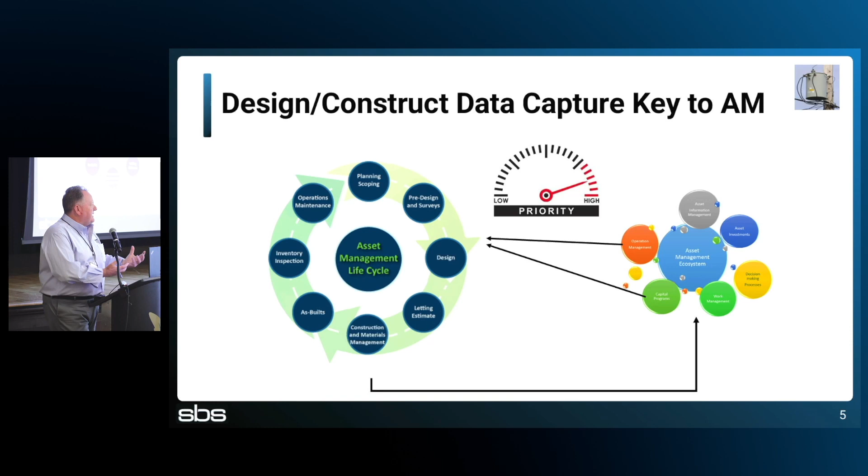I'm sending this data to the field. You put it in the ground. You're getting ready to energize it. I need to know my AMS system. I need to have the finance costing. I need to have all this data to get these safety things done going forward.

So really, the design construction part of asset management was really kind of a low priority. Go put it in the ground, we'll get it in the GIS, we'll get it into SAP and Maximo. It wasn't timely because we'd just make sure at the end of the year, come October, we'll pay our taxes on it.

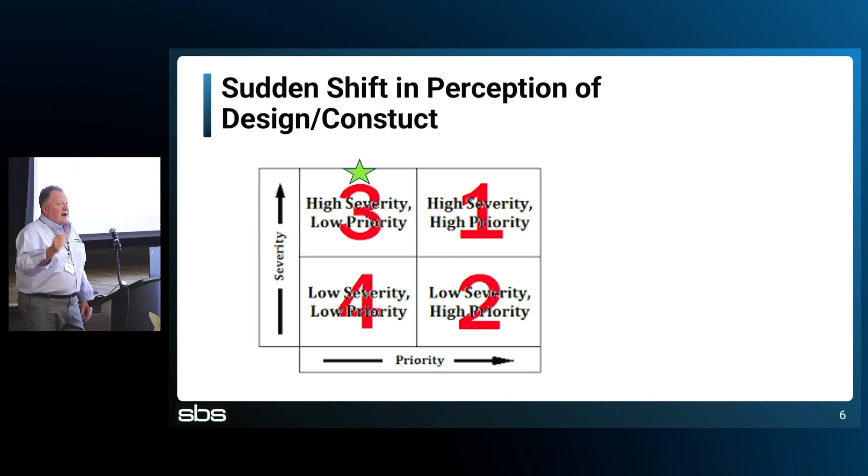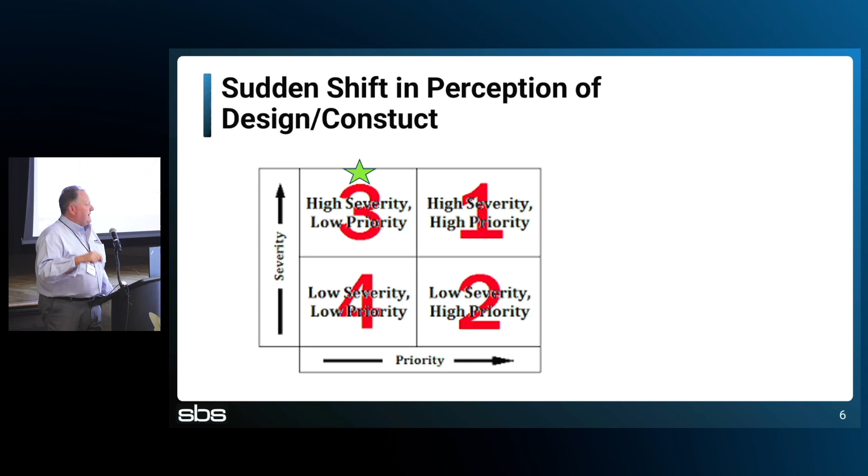But it's now becoming, I need to know what is in that ground and what is energized the moment you declare it's going to be an asset till the moment it is an asset. We now have utilities where it's an asset the moment it falls into your design. It gets an asset ID immediately, before it's even gone through the process.

So at this point, we're going to turn it over to the truly technical person, Sergey.

All right, so we tried this time not to bother you with just a standard demo, but really focus on one specific topic: how you, as a designer, can collaborate with the field, and what kind of tool technologies are available out there so you can really take the benefits and advantages of that close collaboration.

And we have quite a few examples to share, so I'll be switching back and forth between being a designer, and then I'll play a few roles in the field. I'll play the role of a crew member, a foreman, accepting the job, and that's the setup. So we have AUD running

in the office, and it collaborates with the field maps through, in this case, Esri ArcGIS Enterprise. I just want to set the stage. So everything we show as a workflow and steps is actually enabled with the UDH integration with other mobile frameworks. We use Esri Field Maps as an example, but capabilities are very similar if you use Lacana or other technologies. So we have integration built in. Field Maps is just an example here.

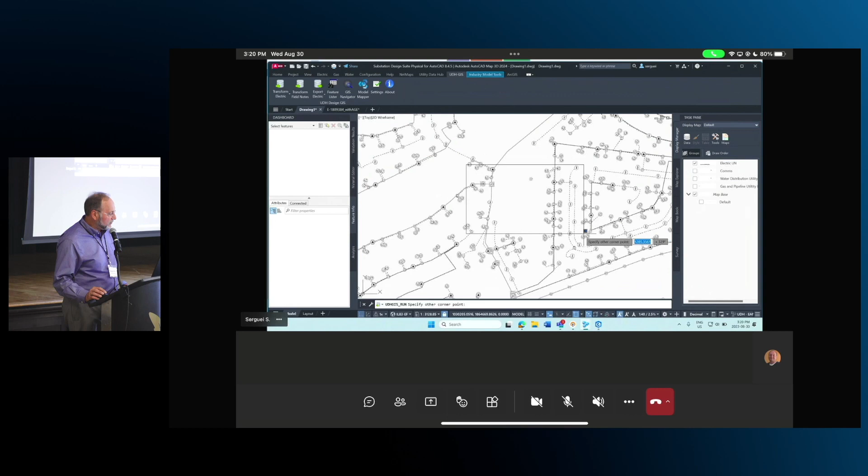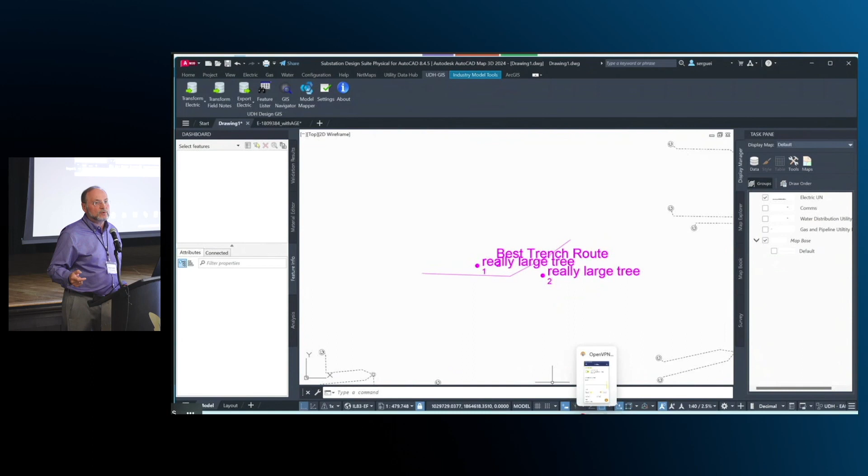So I switch to Utility Data Hub for GIS and say, bring me field notes. If I select area of interest, it reads live feed from my mobile application and shows the details of what was captured in the field. There may be multiple kinds of details important for the designer, like construction or staking details, or if you have a high accuracy GPS receiver attached to an iPad, you can capture the location of your features. In this case, that's the tree, and that's the best trench route.

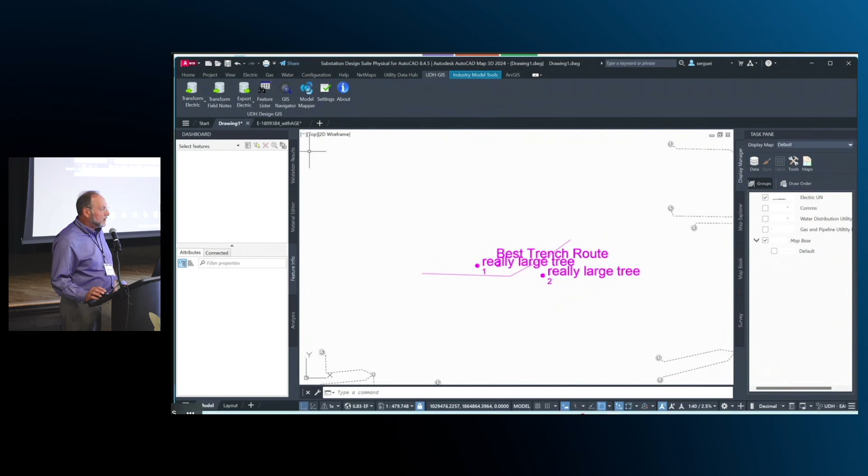So with the best trench route, I can now convert features into AUD design. It's a layer in AUD, and I can just do conversion of those features into design. I've actually completed this design, so I'll open the design that was already done to make it easier for you. You've seen how AUD handles drafting all the assets.

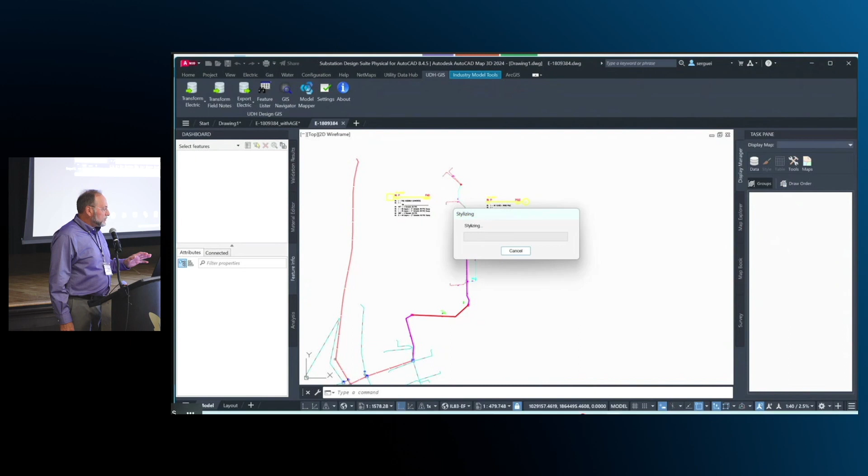I want to show you the results and how we can share design data with the field now. So we saw how data is coming from the field. Now we're going to send information back.

For that, we have two things I would point out. First of all, there is a work order polygon, which is a work in progress. We typically create it at the beginning of the design, and it's published to your design container, so it's available for end users to see.

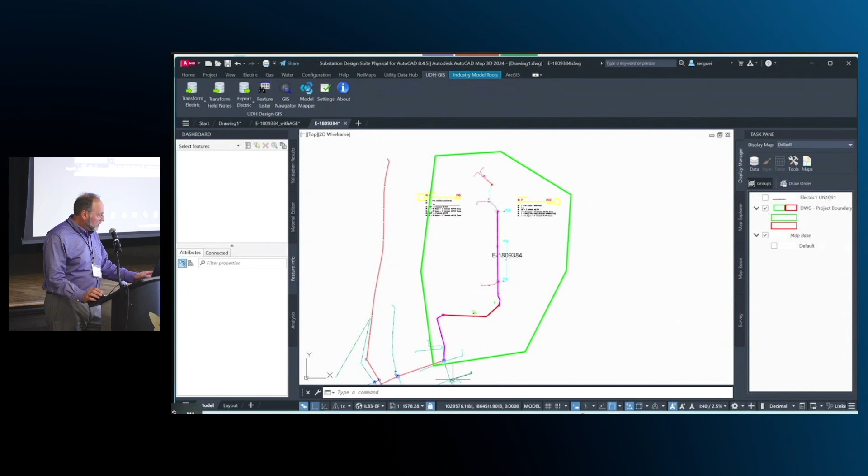Once that's done, you just run the publish process, and it submits the design features. Now the entire design is published and available in the design container. So if I look here, this is my design dashboard.

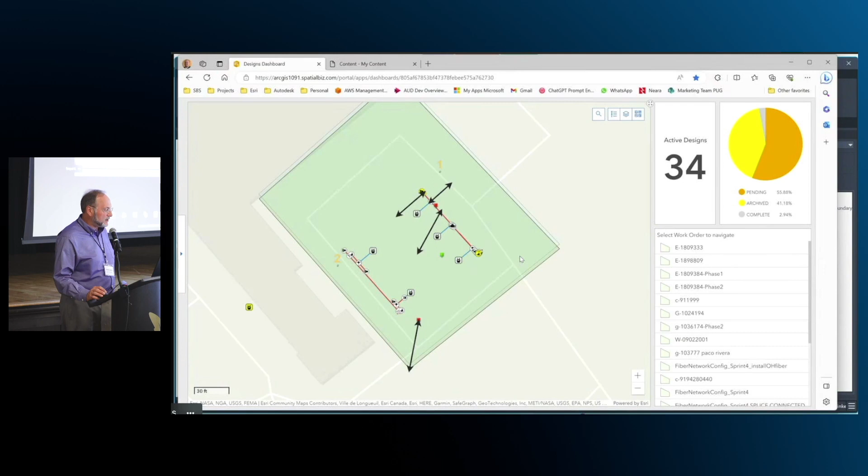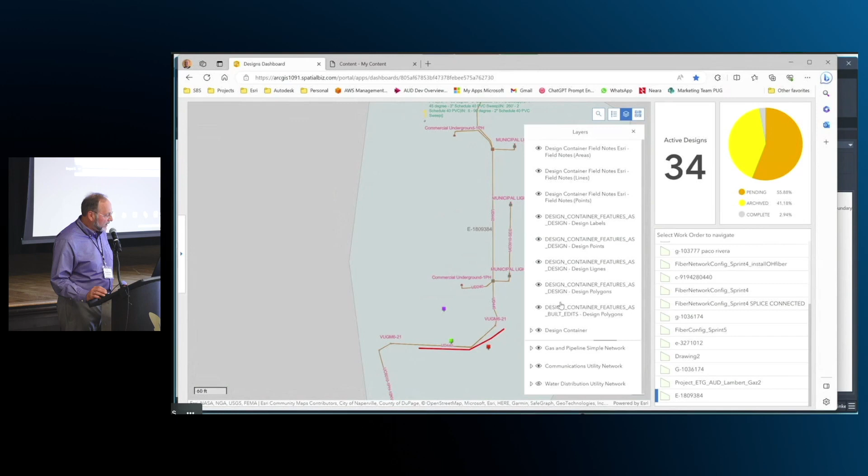E1809384 - so it switches and shows the location. Just to see it better, I can turn off communication. I have access to communication, utility network, gas network, so I'm turning it off.

So I was in design, created and drafted the design, pressed a button, and now the view of my design with all features and attributes is available in that shared browser view.

Most utilities have a system of engagement, maybe ArcGIS or another web-based tool where you can see the maps. What we're trying to show you is there is technology that allows us to do real-time publishing. You can publish to layers in your portal, and the entire organization can see the design work and all the work going on.

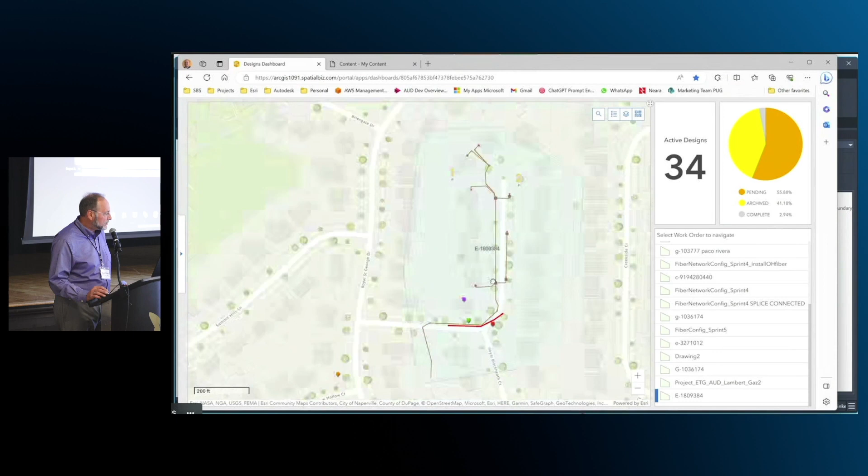So I see my design features and I see work locations. I can query, and actually I can do reviews and provide comments on all these elements. You can see it gets highlighted.

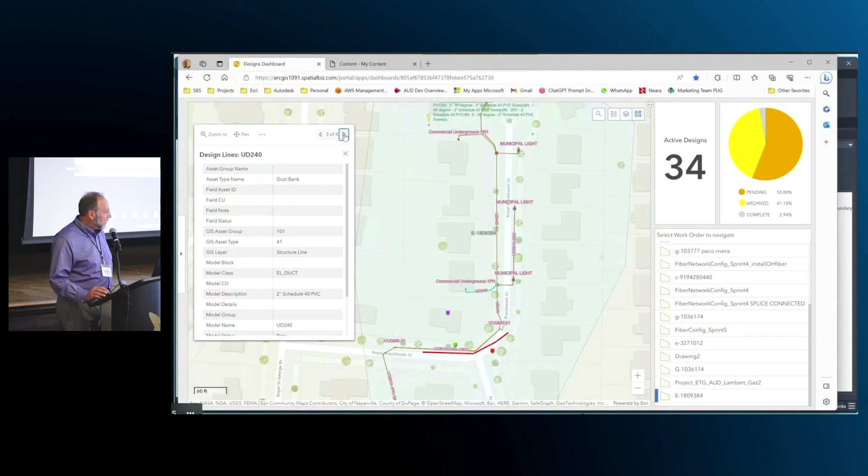Because it's shared in ArcGIS Enterprise, it's not yet in GIS - not yet committed to GIS. It's available in a staged area, but it allows us to see it.

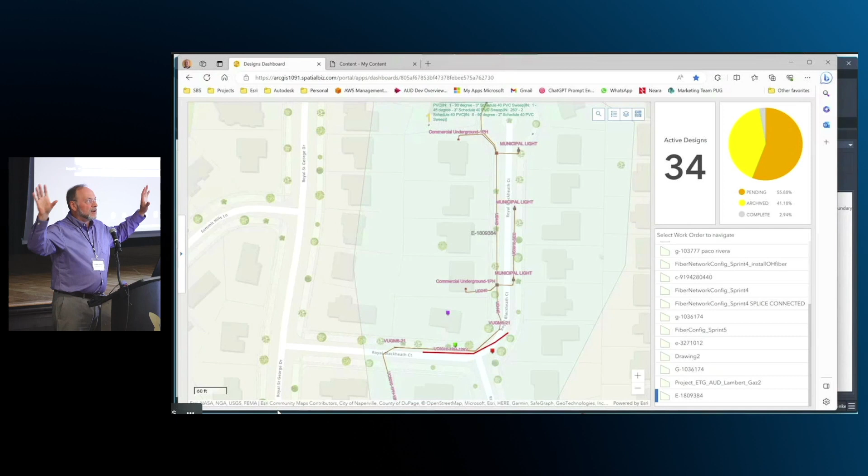Now I'm going to take a leap and go to the field. So I'm playing the role of construction crew and foreman. Are you still with me? I'm just going back and forth between different screens.

Right now, we publish the design to ArcGIS Enterprise Portal, and now I can see all design features. They are queryable - I can query, I can provide comments, and it allows me to publish the design job to the field. We're talking about a digital construction package, so it's not only just a view of design features - you can see there are work locations and the material list. Everything is published from AUD to the field.

So I'm switching now back to my iPad, and I will be receiving that information in the field. I'm running Field Maps - you can see this is Field Maps, and I'll open my design.

So I basically open the map. There are two scenarios: it can be created as a package, prepared on the server so you can use it offline. At this stage, I'm connected - I have Wi-Fi or other LTE connection, so I have a direct connection to ArcGIS portal, and I can see what was just published.

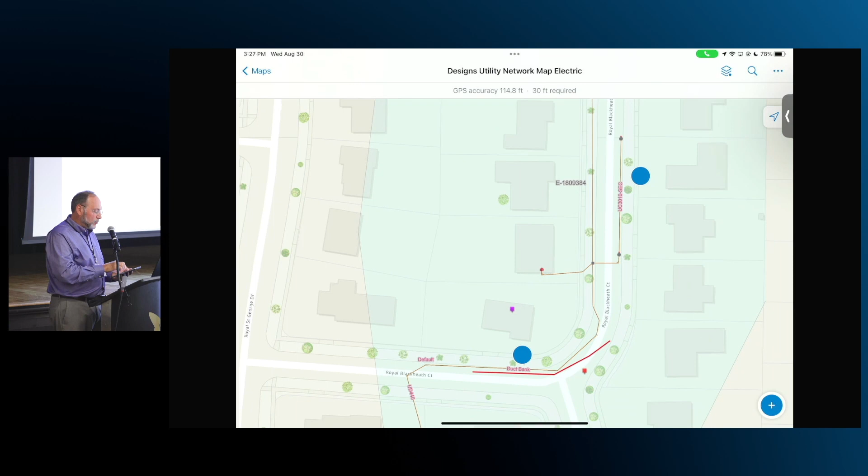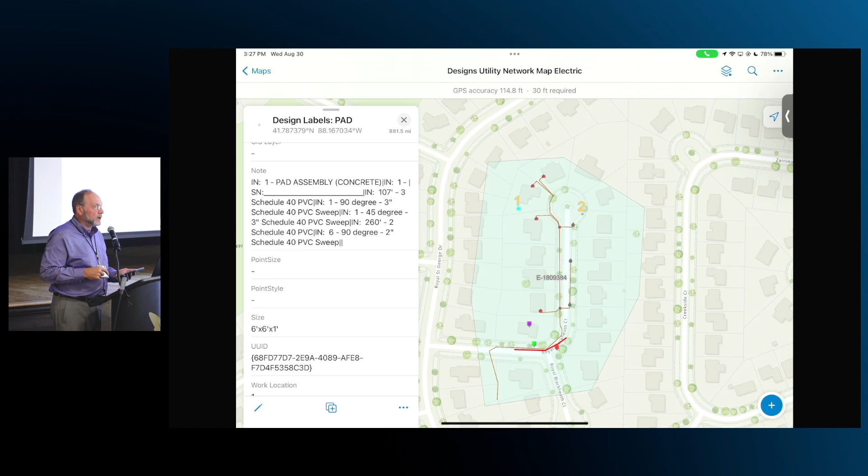This is the published design, and you can see I have a work location, so I can query and look at the details of what needs to be constructed. I really see the details about the job that needs to be done.

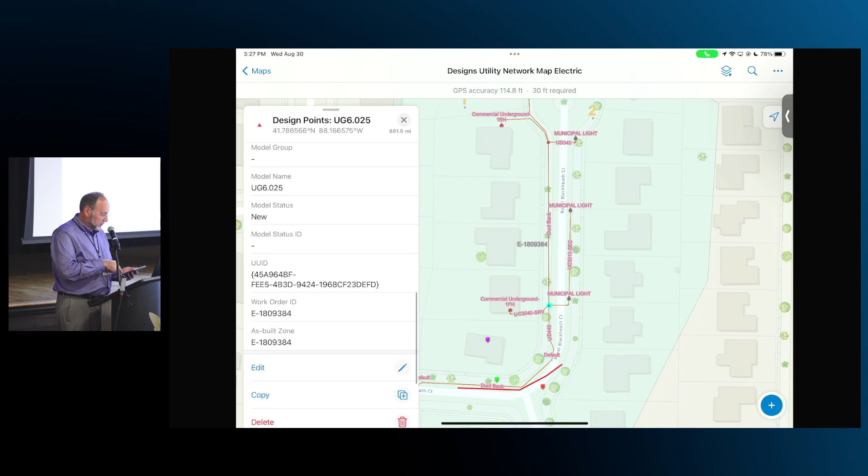Also, because it is Field Maps, it allows me to capture and edit features. I can select a feature - in this case, this pad mount transformer, single phase - and I can edit that feature and press this button to update attributes. What is interesting is we provide a way to really indicate if this work is done in the field.

So if I'm reviewing, I can capture barcodes. If I have my barcode scanner available, I can scan barcodes. There's no handy barcode here, but trust me, it is possible to capture the barcode value.

And if everything is done, I can update and mark this feature as as-built, which requires me to select the as-built status. In this case, I captured the barcode, updated attributes, and I can attach a photo - update a point, capture a photo.

And that's basically, once I do it, it's available. Take a photo, let me just do it. At least this will work. Okay, here we go, use a photo. All right, so now this photo is attached.

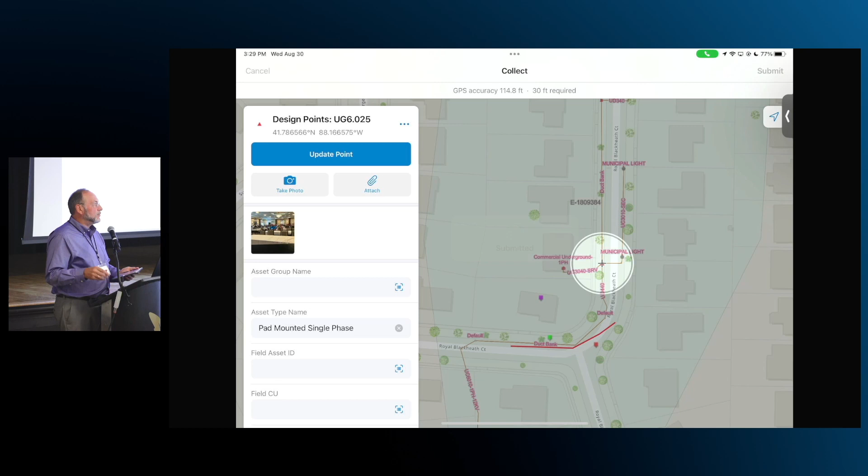So I've done a real as-built of the job, and I just need to submit. Once I submit it, it goes directly back to the portal, and as a designer, I immediately see the change. So that creates a new scenario, new ways of collaborating between the field and the construction.

And so being in the field, if I have a problem, I can actually present the problem, describe it, submit it back, and the designer can review, or someone else in charge can see the change and react and update the map.

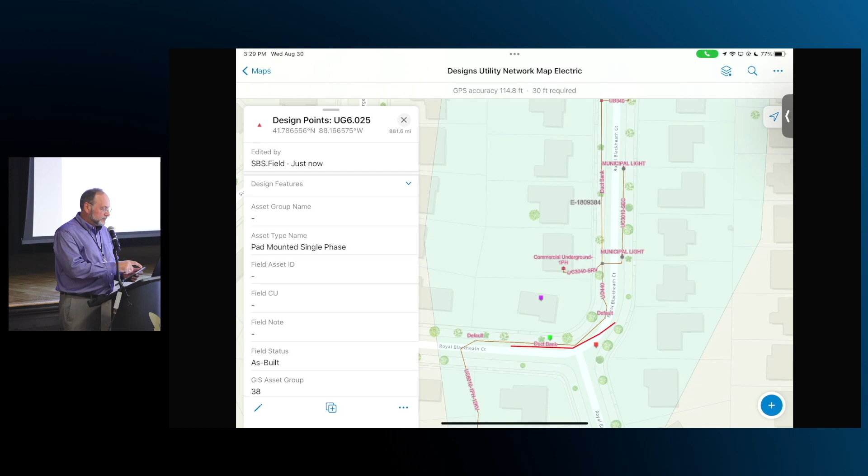In this map, what else? As I mentioned, there's lots of good information published as part of this design construction packet. So I switched to another location, and if I click on this work order, and the work order polygon, it has all additional documentation attached.

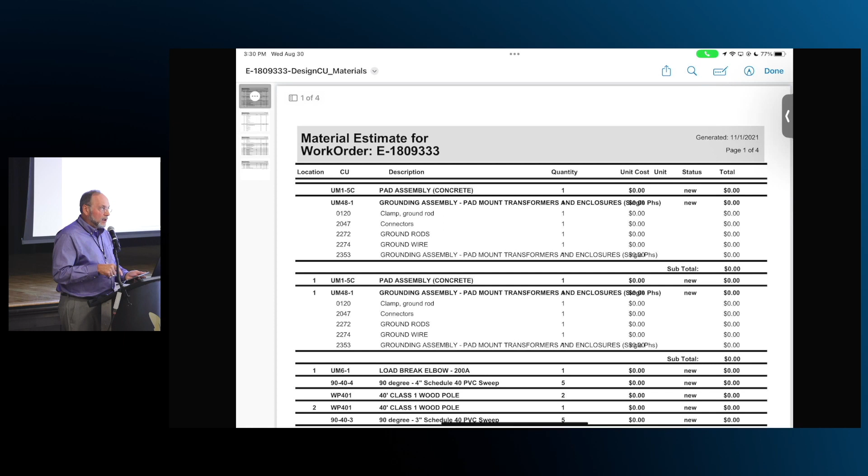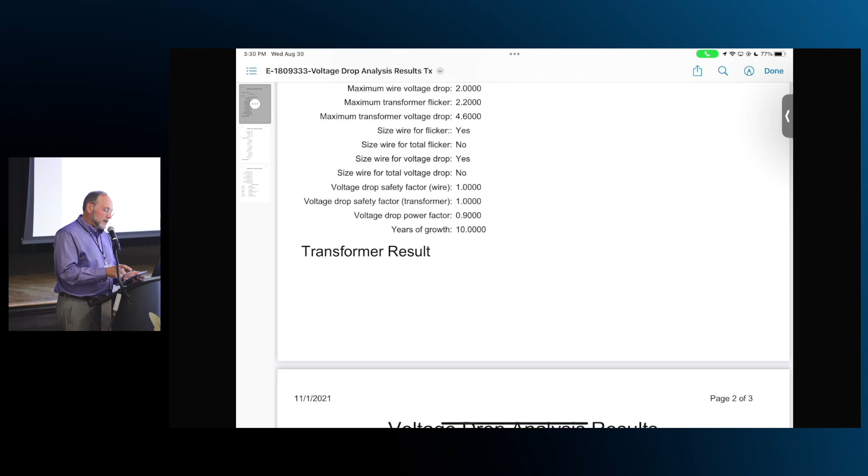So it's not only the design CU material list, so I can click and open a list of materials. I can also review voltage drop analysis, all the great documents that can be generated, created in AUD on this specific work order. They're basically attachments to the work order polygon.

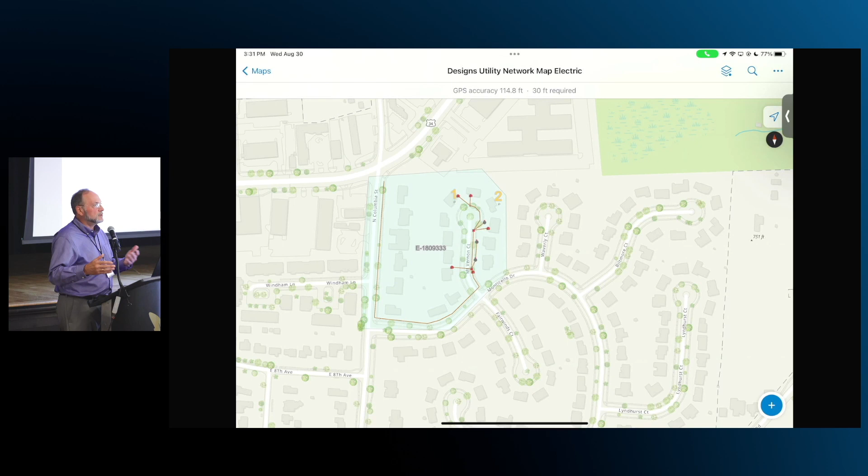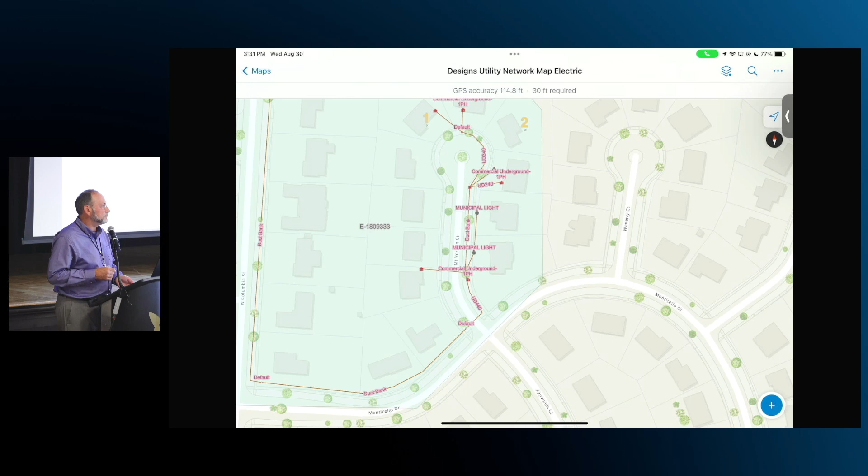And another kind of opportunity, instead of creating construction packets and publishing them in PDFs, field maps in this case allows us to use ways of attaching PDFs or actually creating, publishing design features with all relevant attributes, and allowing field crews and reviewers to access that information. So, Sergey, even that's not in the live GIS, it's available to all the systems in the enterprise?

That's a very, very important point. And I'm going back to presentation. So we are right here. We use this design container to share information. So it's not yet propagated to GIS. GIS is a system of record.

So it shows topology. That's what you currently have in a field that's energized. We are still in design work, it's being constructed. So one way of doing it is just not necessarily update GIS, but display it as an overlay layer. So you see your as-built GIS plus all the design work going on in this area. And once it's constructed and as-built data is collected, that's where we collect those transactions and update a combined set of transactions, design changes, as-built changes, funneled through the playback manager and update GIS.

I have 3 questions. The first one, this design container, is that just a hosted feature layer in portal? That's correct. It can be hosted feature layer, it can be geodatabase with published services, or whatever technology is available. It is not in GIS, but it's a staged area for designs. Designs are there, published, ready for update to GIS, but not yet in GIS.

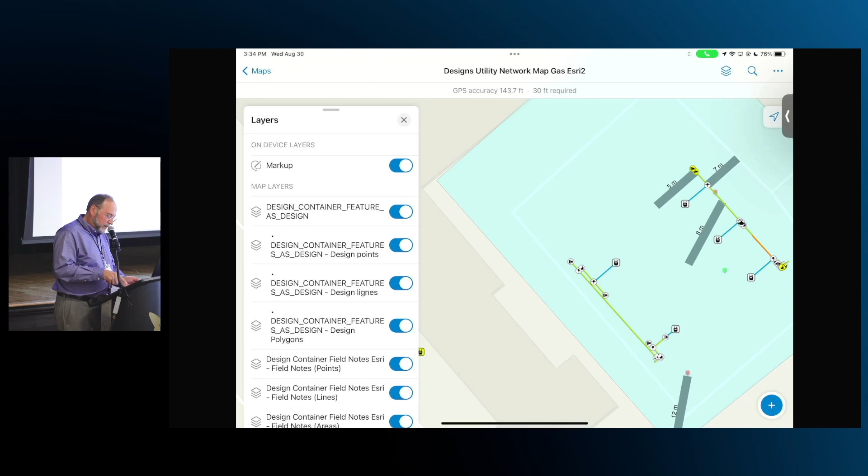Okay, so now we're going to switch to gas. You said you have a gas. So I'm opening my gas network demo, and we'll navigate to location. So this is an interesting prototype, what you see is kind of a live demo. Those thick lines, it's just symbology.

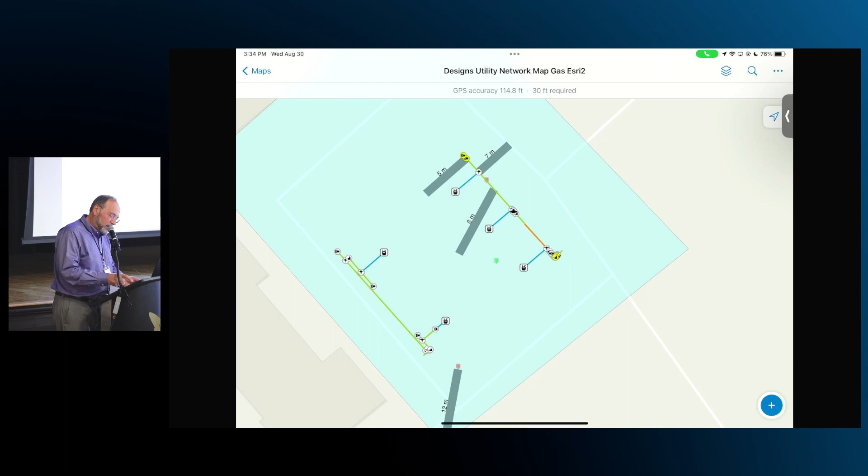They're supposed to represent dimensions, and I'll show you. They look really cool, but for some reason today they're shown as a thick line. So this is gas update, so there's existing lines and update. So if I look at the legend, you can see, so there's as designed, and you can distinguish distribution pipe as built, design, or as built. And we use different symbology. So the same symbol in this case, meter is white when it's designed, and as built it becomes yellow.

So that allows us to create 2 views in the field. One is as designed, and because we know construction sometimes it's not necessarily exactly on the same spot. And for gas, it's very important to use the exact location in the field, how it was constructed.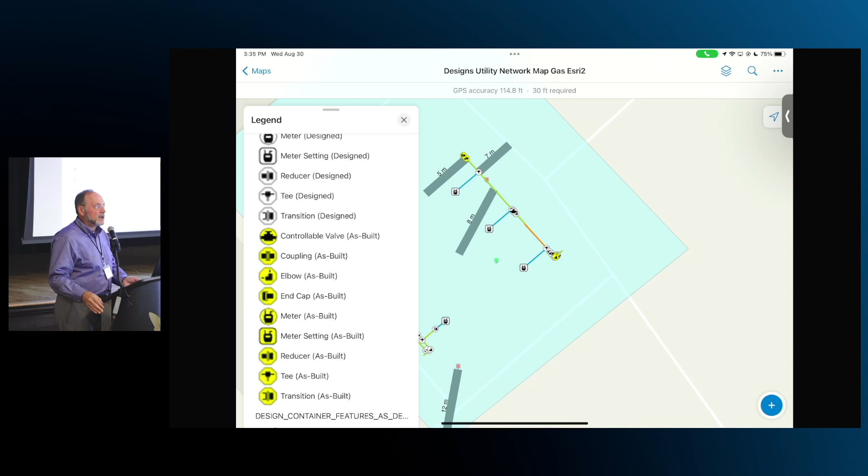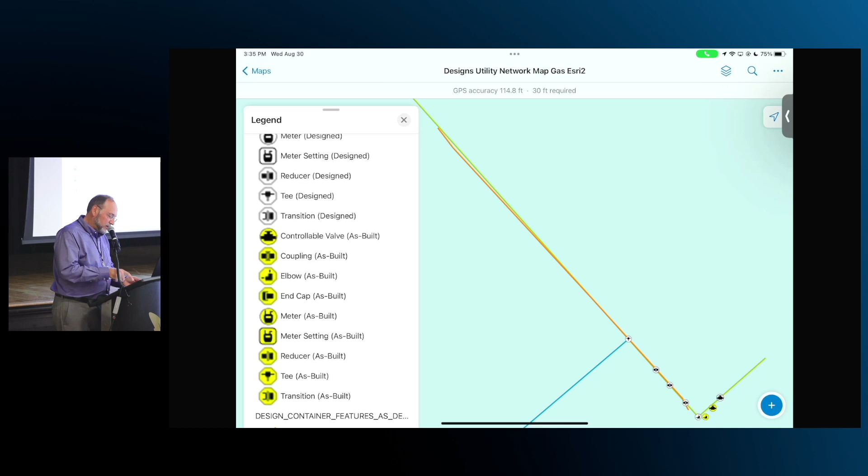So in this prototype, what you can see, we have done field tests. So the green line is the distribution pipe design, that's how it was designed. And then with the high accuracy GNSS receiver attached to iPad, the crew team captured the exact location of the pipe. And you can see it looks good in many locations. And by the way, the distance is really minor.

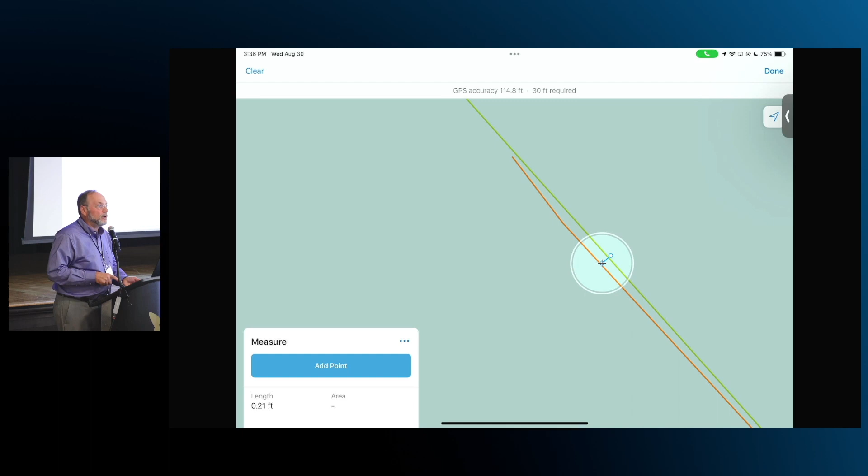I have to zoom in, but if I measure distance between these 2 points, it's 0.2 feet. So it is really, really, really close. But again, high accuracy GPS receivers attached to iPad allow you to get the level of accuracy you need for your GIS.

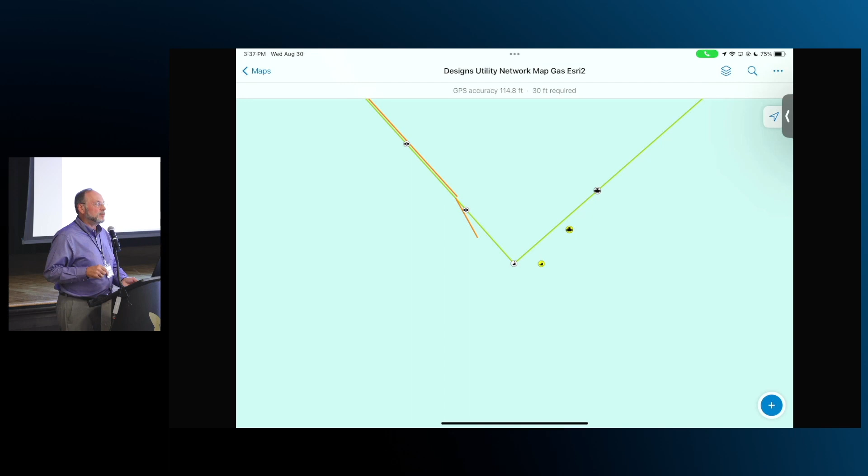So let me show you a couple of more interesting capabilities that we added to field maps, added with Arcade script, which is natively supported by field maps.

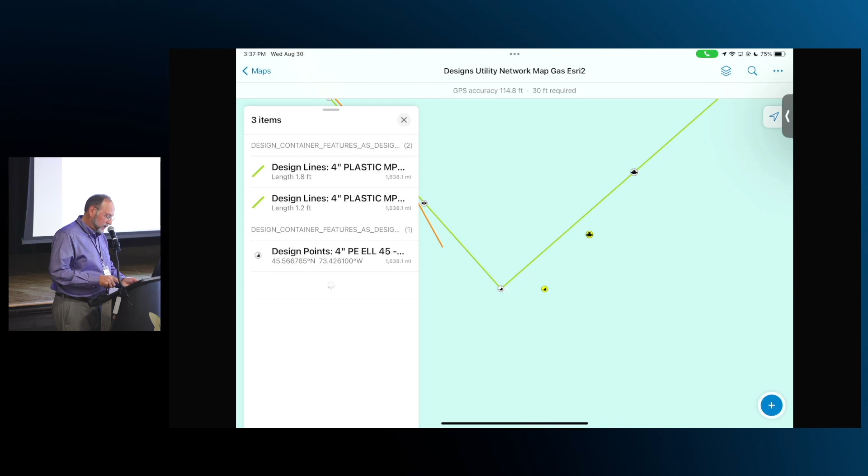So you can see here, this is the plastic pipe elbow, and it's in a CAD. These are different attributes, the model CU and all the model descriptions, and where the cap was captured in the field.

Interesting part, you can see this CU model is not in the list of supported ones. So as an opportunity, when we published from AUD, we know based on the standards what valid CUs and what valid materials can be used at that location, and we publish it along with design. In this case, the designer selected field CU, and it is PMFTS2, while the only allowed CU in this location, I can see in this list, is PMFE45.

That basically creates opportunity when you do as-builting, at least you're getting immediate feedback. So you have a standard, and AUD works on a standard base, and we publish to field design construction package with the features.

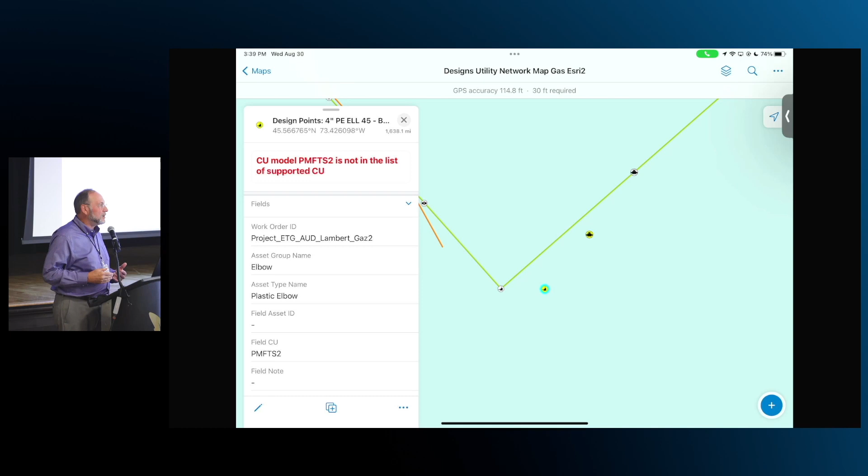We also annotate the available change parts, so if you don't have it in the field, you can't just put any other incompatible material. You have to use one of those supported by your standards, and we communicate that. This is a message you get if you install it incorrectly.

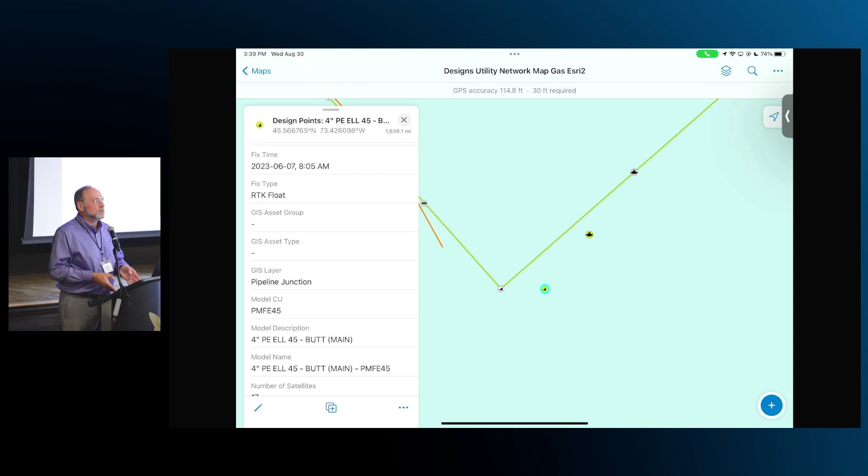So in order to rectify, I can just edit and change it back to that supported CU, and the message is gone. So it's basically the way to update and notify. All right, so I hope that makes sense.

So as a result, in this prototype, we provided a way of overlaying design data with captured as-built information, and all these changes now can be funneled directly from design as-built from the field going into Playback Manager. So Playback Manager combines transactions coming from design updates to network, validated in the field with the design, with as-built nodes. As a mapper, I see all the changes done in the field and in design, press a button, and update GIS.

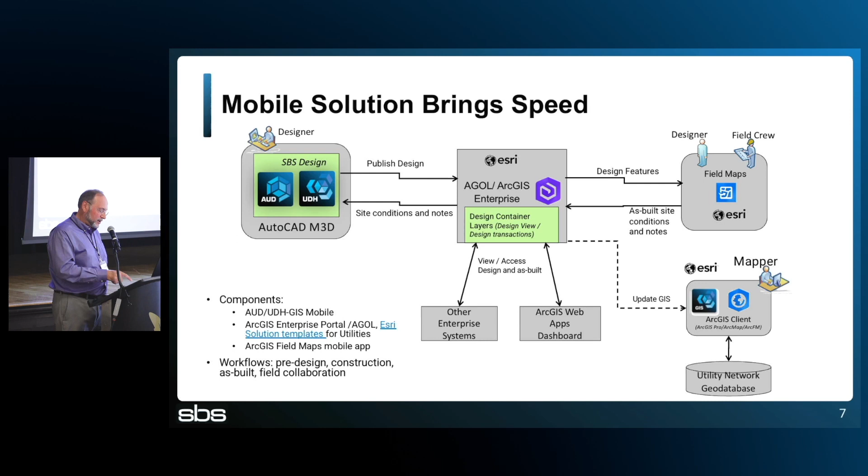And as a reminder, even though we're showing field maps, we've done this with Lemur, Locus View. I'm trying to think if we've done any other ones. Field maps, yes, that's major 3, correct.

Have you integrated it more for like our big ask in our areas where a designer can mark up and use it in AUD? Have y'all integrated it like that where they can bring it into AUD and then use it to design off of? Correct. Okay, yes, that's what I started with.

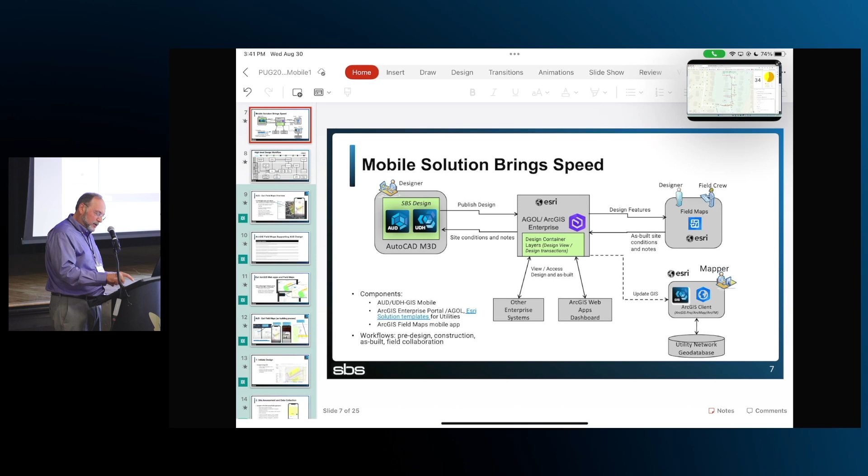Data is collected in the field, and you can see the map, like you can still see the whole existing facilities. Okay, yes, that's the demo.

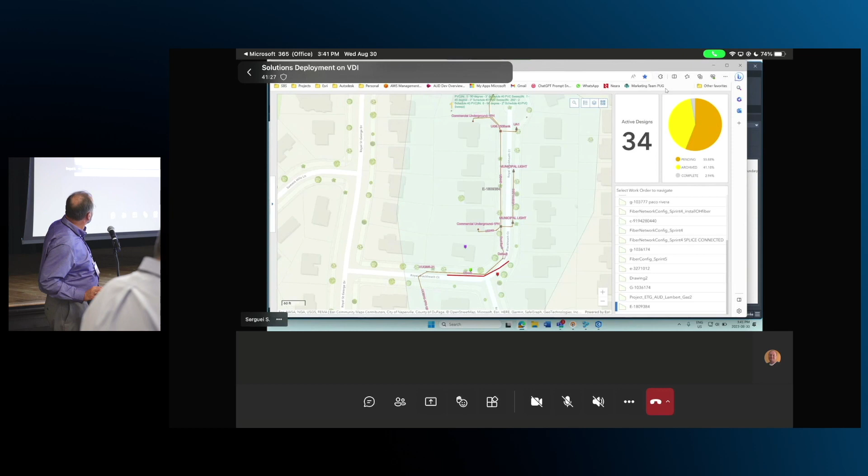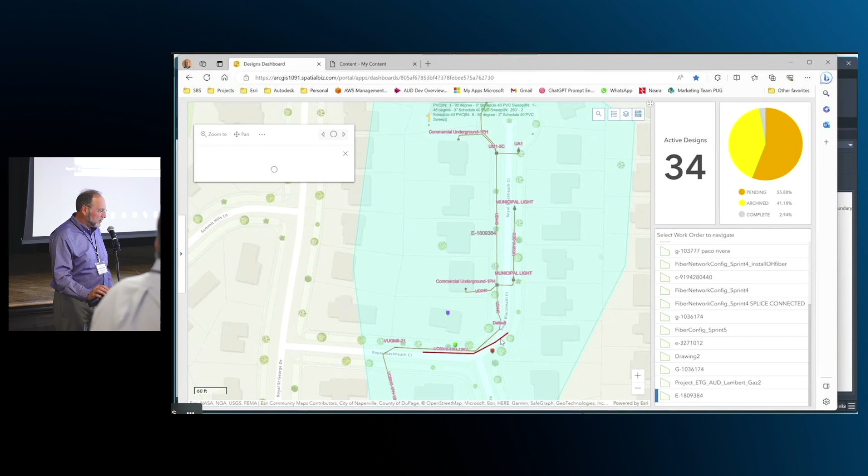So that's where I'm in AUD now, and I can see data is coming from the field. So all these points and this line, I can convert this line in AUD.

Finally, I got it here. So this is design, and I can connect and update features coming from the field. So this is my way to get data that is captured in the field.

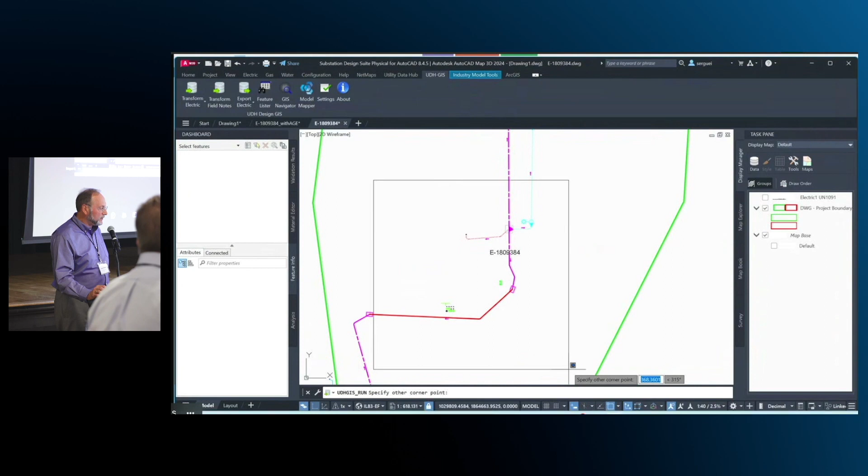This would also be like if you had a tree and you had the tree model like Jim showed earlier, you can convert that tree into the model, and now you would be able to go off it. If you go out in the field and say, oh, our water company lied to us, there is a water pipe right here, you can draw that polyline, and then we have a command that's redraw with existing geometry, and you would click on that polyline and it would convert into a water pipe. So now you can do an offset from that water pipe. So you'd have to convert the CAD feature into an AUD feature, then it's a model.

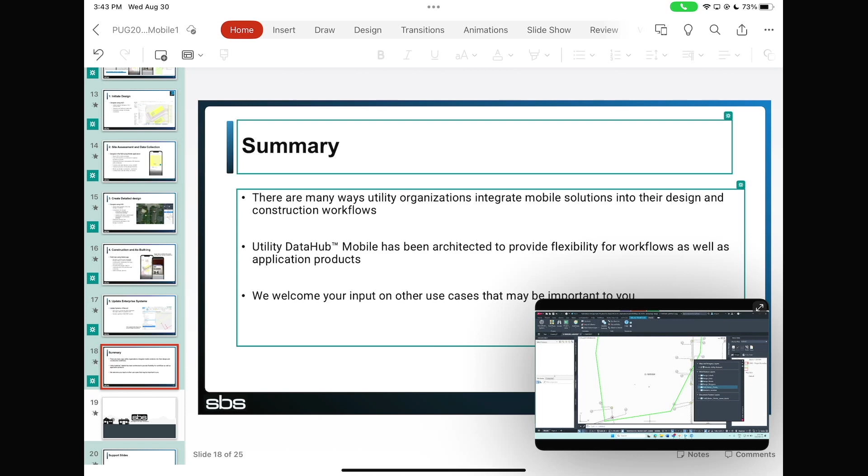We've presented you quite a few ways of leveraging technology, and the important part is these days technology allows you to capture very high accuracy data in a field and collaborate with a designer at the same time. And in our diagrams, you saw the designer being in a field and in the office, the same person taking the mobile device and executing workflow along with AUD.

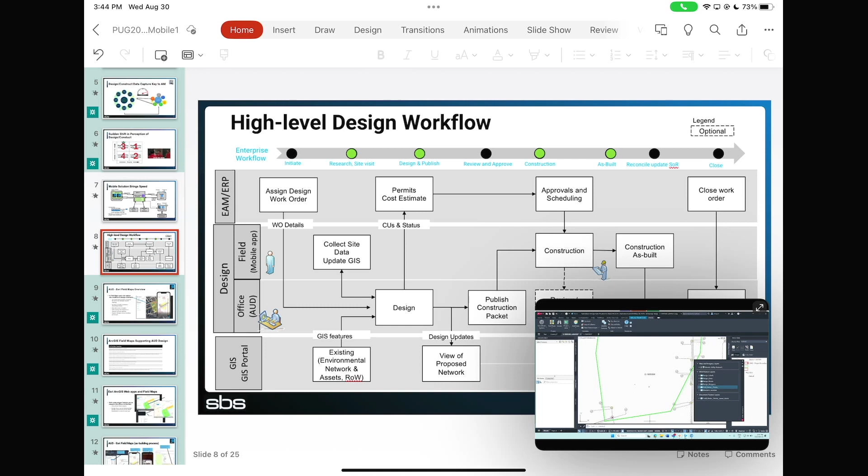And if you look, basically a typical view, we see the design, but design is not just AUD. Design workflow includes AUD being in office, and for my design work, I'll do a lot of work in a field. I do staking, I do site condition checks, it's everything. So what we're trying to establish is a seamless workflow.